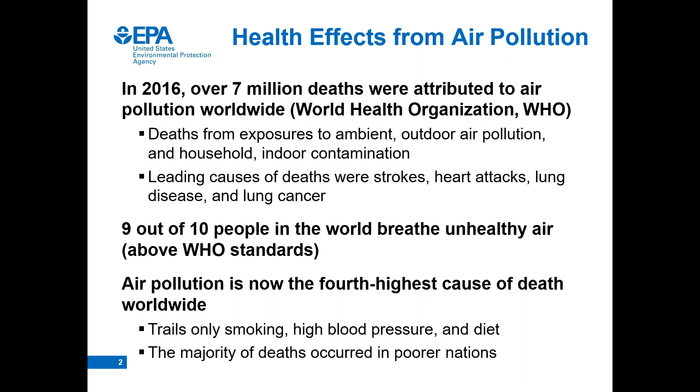So we can go to the next slide. And essentially there's 3 primary sources of air pollution from transportation sources, specifically traffic. So we have combustion of fuel, so the exhaust emissions, and we do tend to separate those by exhaust from cars and exhaust from trucks. In a lot of countries, light-duty cars and passenger vehicles tend to use gasoline, heavy-duty trucks tend to use diesel. And there are differences in those emissions as well.

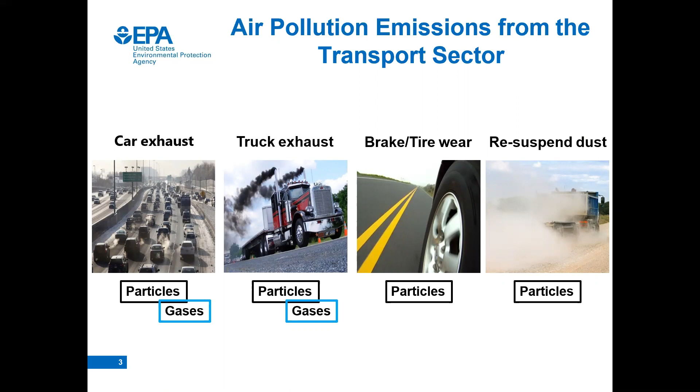But then we also have brake and tire wear. We also have the dust that can be re-entrained from transportation sources. And again, these all can contribute to particulate matter in the air, but then also can contribute to quite a few gases that can be emitted, especially from exhaust emissions, things like nitrogen dioxide, carbon monoxide, toxics like benzene, toluene, etc. So we can go to the next slide.

And transport is really the most, if not the dominant source for local, regional, and even global air pollution. Again, I'm going to tend to focus a lot on the local air pollution issue, but keeping in mind that a lot of this is relevant to regional and global air pollution. In many urban areas worldwide, 70% or more of particulate matter can be attributed to traffic and other transportation sources. Often, actually, we know worldwide more than half of nitrogen dioxide and carbon monoxide comes from transportation.

And again, we know, especially in exhaust, but also even tire and re-entrained dust, that there's hundreds, if not thousands, of other contaminants and compounds that can be emitted, many of which are known toxics or cause adverse health effects. So we can go to the next slide, number 5.

And again, transport can actually affect disproportionately low and middle income countries in particular. There's many reasons for this. I just listed 3 of the major ones. They often have older, poorly maintained vehicles. Often they're secondhand vehicles shipped from wealthier nations as well. And so their operation, their maintenance of their after treatment, their air pollution control devices can be questionable and sometimes they're removed.

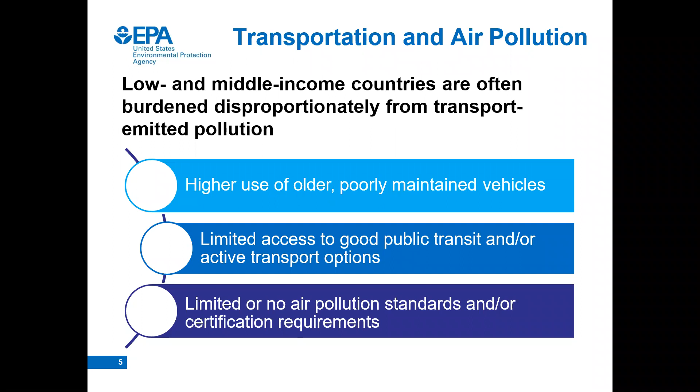And again, because transportation, traffic in particular, are so ubiquitous and so many people worldwide are exposed to these emissions daily, there's actually been hundreds of health studies that have really focused on this population that is so prevalent, both living, working, and going to school near large transportation facilities. And these studies are fairly consistent, showing this higher risk for these populations spending time near these impacts.

Things like asthma, cardiovascular effects, birth developmental effects, premature mortality, cancer, including childhood leukemia, have been shown to be elevated, and even things like cognitive effects. Autism has even shown association with spending a lot of time near these roads. I have on this slide a cover for a report done by the Health Effects Institute, which was a large meta-analysis that really first showed the consistency in these findings and concerns about adverse health effects. So we can go to the next.

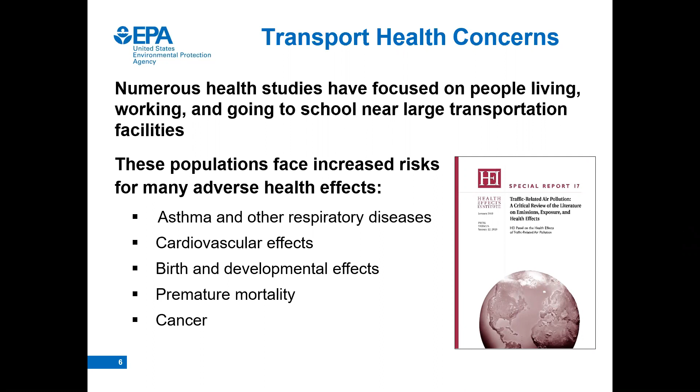There have been a few studies that have shown that pollution can be elevated near these large transportation sources, especially within the first 200 meters. So on this slide, I have another meta-analysis. It was done on about 50 studies worldwide measuring air pollution changes with distance from large roadways. And we can see on the far left, pollutants can be as much as an order of magnitude higher within that first 100 to 200 meters of the roadway compared with further distances away.

So again, exposures can be much higher and they can be much different near the road. So this is one of the causes for the concern for all this elevated health risk for these populations near the road. And so we can go to the next slide.

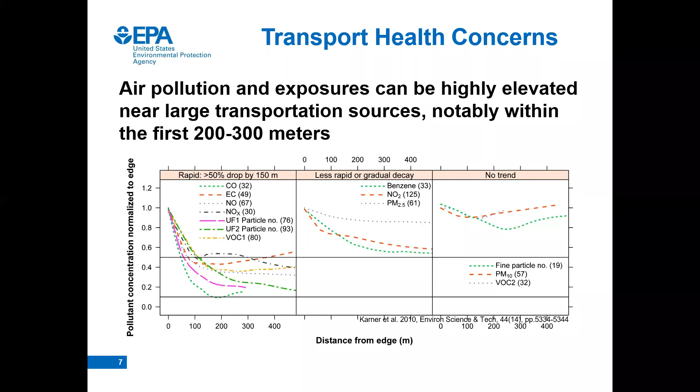And even though we're really talking about small distance, there's actually quite a large portion of the population that either lives, works, or goes to school in this short distance because it is such a center for economic activity and development in our urban areas. And me working for a U.S. organization, I do have some statistics for the U.S. We estimate over 50 million people live within 100 meters of a large transportation facility.

Most of that is our large highways here in the U.S., but that does include airports and ports, rail yards, and again, all of these are sources of concern and interest as far as elevated exposures. We also estimate over 4 million children attend classes within 150 meters of, just in this case, a major highway.

And I have a couple of pictures just kind of showing examples, but they estimate that about 1 in 11 schools in the United States are located within this distance of a major highway, and actually 1 in 5 new schools, which makes it even more of a concern. And then we are finding that these numbers are often even higher in some of the low and middle income countries as well, where even more development, more population is located near these major transportation facilities.

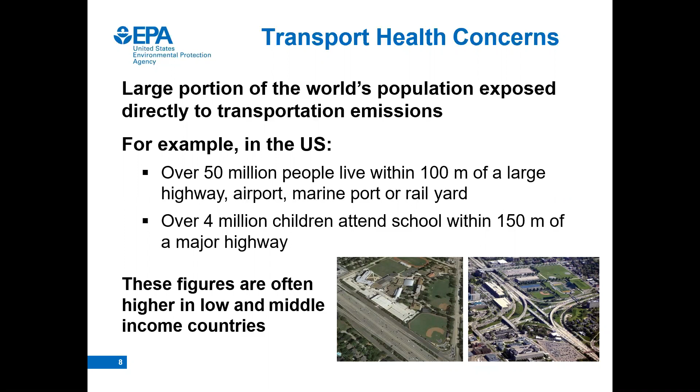So we can go to the next slide. And when we talk about mitigation opportunities, we really kind of target, or at least put into categories, these 3 areas. And that's how I'll present mine today. And so we look at the emissions and how we can measure and control emissions, how we can do that also for just air pollution concentrations once the pollutants have been emitted, and then actually how people are breathing these pollutants in, or their exposures.

So again, we can go to the next slide. And again, just to highlight that we're going to start with emissions. And so then we can go to the next slide, slide 11. So we have a number of programs to measure emissions from motor vehicles and other transportation sources. Again, I should just point out now, a lot of these techniques aren't just relevant for motor vehicles on the road, but we can do this for trains, ships, to some extent planes, although planes are much more difficult.

But again, these programs and these techniques are applicable to these other kinds of sources as well. But because the traffic and these motor vehicles are the most ubiquitous, I'll really focus on that area, but happy to answer any questions on these other sources.

So as far as measurement programs and the importance of these programs, they really do answer quite a few questions that are very relevant. How bad is the problem of air pollution and emissions from the transportation sources, especially understanding the transport sector compared with other air pollutant emission sources, and even within the transport sector, which types and sources contribute the most to poor air quality. Then also, are any control strategies that have been implemented effective, or do we need to make adjustments in the future? So again, these all lead to why measurement programs are important.

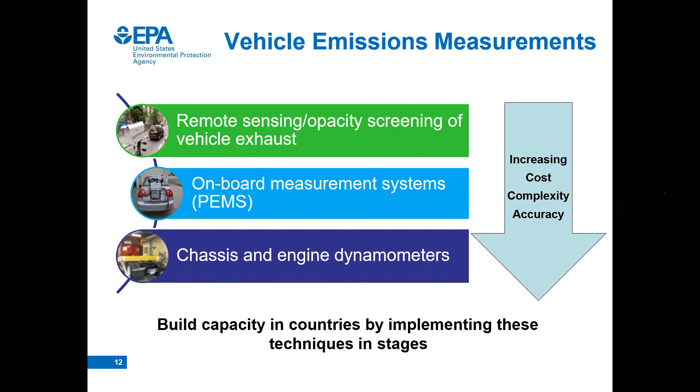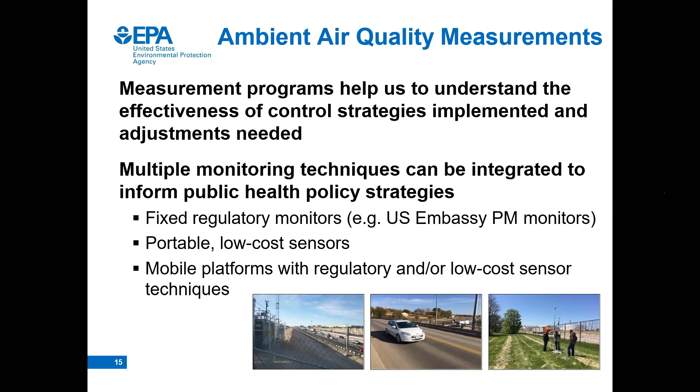But also these low-cost sensors have been really popular used in mobile ways, so people either walk or bike with the sensors, or they've been put in vehicles as well to try to understand spatial variability of air pollution levels. And again, all of these techniques have their strengths and their limitations, and it's important to understand them and often to integrate these different measurements. So we can go to the next slide.

And another area where we do a lot of capacity building is on the air quality modeling side. So when we're looking at transportation source impacts, we have to separate it: we estimate what the emissions are first, and then we also simulate and estimate what the dispersion is in the atmosphere after they're emitted. So there are a number of models that are available for each of these. In the US, we have what's called the MOVES model, and there is an international version called MOVES International.

And generally, what often in other countries that use this, it's based off of U.S. and some European emission standards and typical emission rates. So often those are used initially to understand with local activity data. But then also, they are available. Country-specific emission factors can be integrated and implemented to create a model for a particular country.

So then on the air dispersion side, again, we have AERMOD in the US, so that can estimate these local impacts from transportation and other sources. EPA also has what we call R-Line, which is like a research type of model that can integrate some other issues like, and I'll talk about it a bit, like solid structures or barriers near roads.

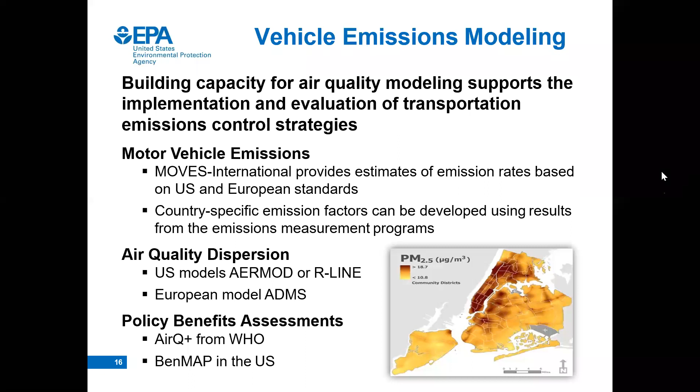Sorry, Richard. Are we still on slide 16? We're losing you a little bit. Oh, I'm sorry. Yeah, no, we switched to the next slide. 17. Okay. Sorry. Yeah, the connection is a little iffy right now. Okay. Yeah. Again, just interrupt if you stop hearing me.

Another program that's grown and been implemented in Stockholm and London is congestion pricing. So you actually charge vehicles for driving in a certain area during a certain amount of times. So again, these are similar to activity reduction programs like transit and walking biking options, but a little bit different because again, they're really affecting air quality, especially at the local scale. If you have an area that's a very, what we call hotspot or very high concentrations, these can be effective programs.

There's also been proposed what we call development exclusion zones. So an example of this is in California. They try to restrict schools from being sited too close to major highways. So it's essentially not allowing either certain development or any near the pollution source themselves. Other than to change or control the source itself, you distance people from those sources.

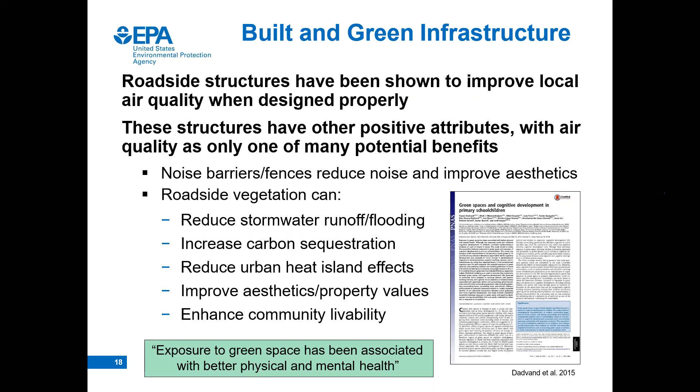So as far as a resource, we developed some recommendations for organizations that are especially interested in planting and maintaining roadside vegetation. The studies show that roadside vegetation can improve local air quality, but some studies also show that it can either not have any effect or even make air pollution worse locally. So we really try to highlight the key characteristics of roadside vegetation that can improve it, but also characteristics to avoid, so you don't make pollution worse. These recommendations deal with vegetation alone, and with vegetation along with solid structures like a fence or a noise barrier.

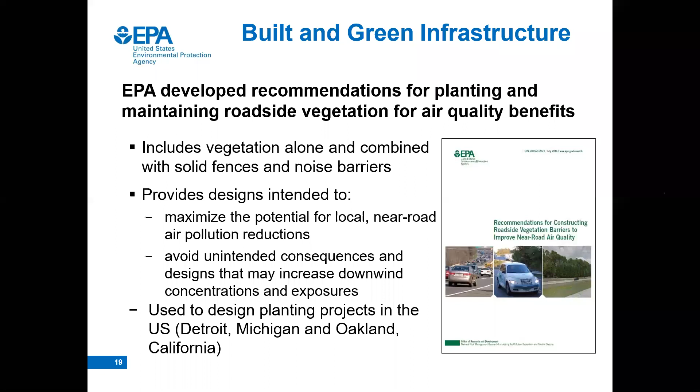And I did want to point out that we developed these recommendations initially for some pilot studies that we did here in the U.S. in Detroit and Oakland. So you can go to the next slide. Again, I won't go into too much detail on this, but I did want to highlight some of the examples that we include in the recommendation.

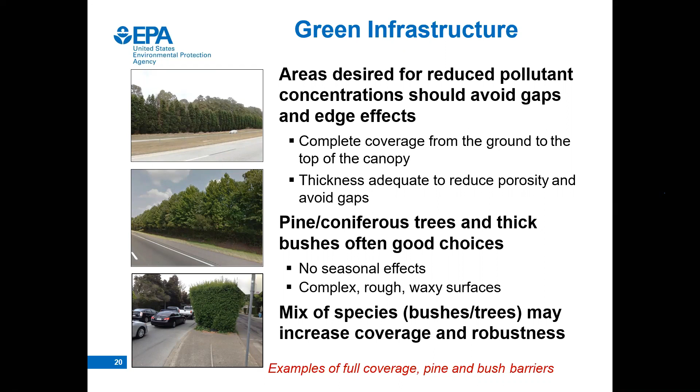So for roadside vegetation to be effective, especially full coverage, from the ground to the top of the canopy, no gaps, no openings, whether it be dead vegetation or highly porous vegetation, using vegetation that doesn't have seasonal effects like pine or other coniferous trees, and mixing vegetation is also highly preferred for maintaining the vegetation and for effectiveness as well. These pictures show a few examples from the report, from pine trees and mixing deciduous and pine trees, to just hedges, which could be more useful for especially dense urban areas. So if we go to the next slide.

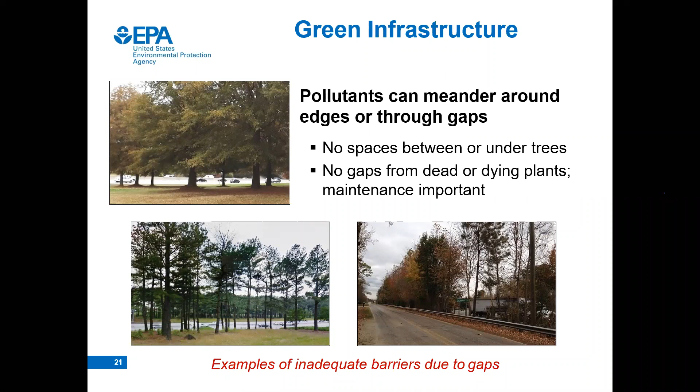And we do discuss a bit about solid barriers alone. Vegetation increases dispersion, but we also get some particle removal from vegetation. With these solid structures, they essentially just increase dispersion and dilution. So they're reducing concentrations downwind, but they're not actually removing any pollutants. But in an area where concentrations can be high, that could be really important for the health of nearby residents.

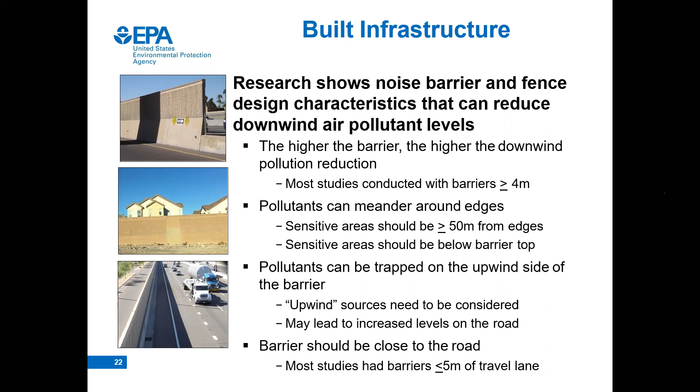Then last, with the next slide, actually, a lot of research has shown that combining the solid with the vegetation can be the most effective, because with the solid barrier, you definitely avoid those gaps down low. You don't have to worry about dead or highly porous vegetation. But then you have the vegetation either in front of or behind that actually also adds the extra removal, especially of particulate matter. And so, whenever possible, combining the two can really be the most effective option.

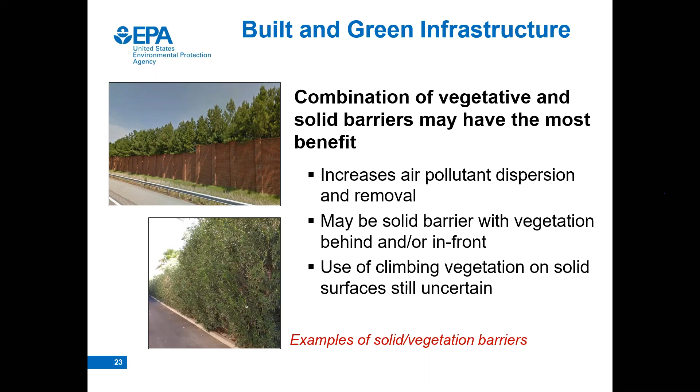And then we can go to the next slide, slide 25. And again, just wanted to point out that we do have some pilot studies going on in the U.S., in Detroit and Oakland. These pictures are for the Detroit project, which is a park right near a major road with about 250,000 vehicles a day. Actually, many trucks. It's part of a big international trade corridor with Canada. And actually across a highway is a refinery that you can see some of the tanks in the distance on that top photo, or the photo to the left.

So again, the plans are to plant a vegetation barrier as shown in the profile drawn down there at the bottom. And we'll be doing air quality, meteorology, and noise measurements before and after planting that vegetation and assessing not just the air quality benefits, but there are some flooding issues at this site as well. So what the water runoff control benefits are to this plan too.

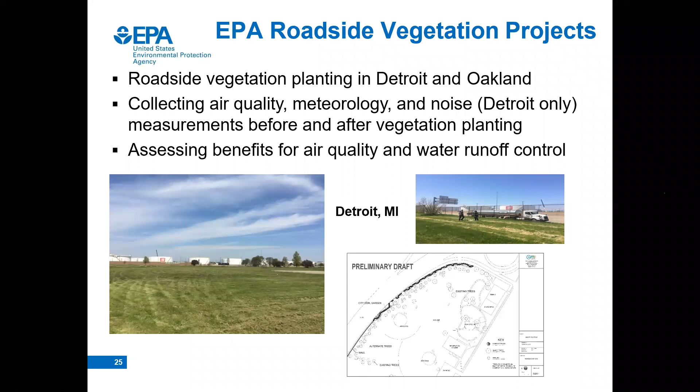And so again, lastly, we also are looking at how we can improve the air that people are directly breathing. So we're looking at exposures. So we can just go to the next slide. Again, so when we're looking at exposure reductions, we're really focusing on indoor air filtration, but we also do want to look at ways, again, to improve outdoor air, whether it be through emission standards or some of the other concentration techniques like built and green infrastructure I mentioned earlier. And then also we want to consider changing how we develop. So you can go to the next slide.

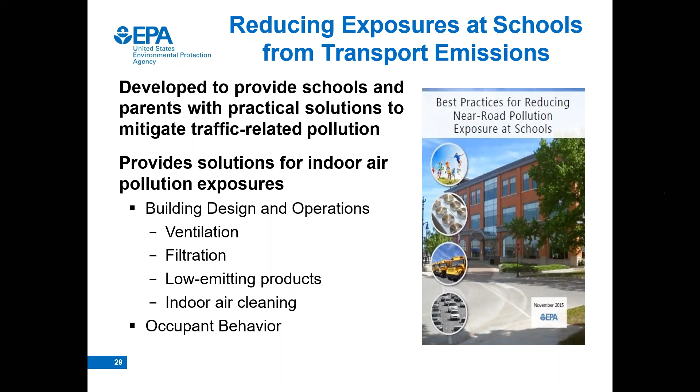So again, just a few examples. So like for indoor air quality, we talk about ventilation options, using low pollution emitting products and materials inside the building itself, as well as portable air cleaners, if doing central air isn't possible, and the effectiveness of those air cleaners. And things like occupant behavior, when to open windows, when not to open windows, don't open windows, especially during rush hour, when vehicle traffic is high, when air pollution levels in general are high because of morning inversion conditions and things like that. So they're trying to educate on some of the timing as well of when air pollution can typically be high in an urban area.

So you can go to the next slide. And again, the guide also addresses outdoor air issues. So there's things on site, whether it be for people picking up and dropping off kids, where they're not idling, or at least reducing the amount of idling, and upgrading buses.

And again, since this is a little bit U.S. focused, it was really talking about upgrading of school buses, but for other countries this could still be applicable for transit, either directly for schools or transit that's passing by schools or that the kids are often using to get to and from school. And then it also talks about walking and biking and really trying to encourage those options for active transport.

Again, the guide also deals with the roadside structures like I talked about earlier. And it also deals with site location and design, which I'll talk about here in a minute. So we can just go to the slide.

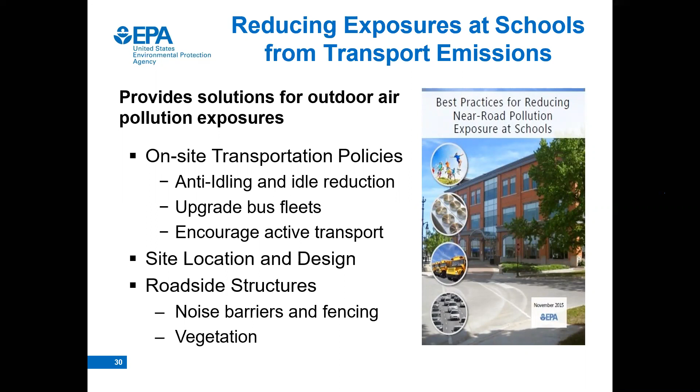And this is actually some work that's ongoing right now, that we're drafting some recommendations for, really trying to target developers and planners. As I said earlier, in the U.S., 1 in 5 new schools are located within 150 meters of a major highway. It's really trying to help them understand how that can affect kids' exposures and how maybe to redevelop land. So we just kind of give guidance.

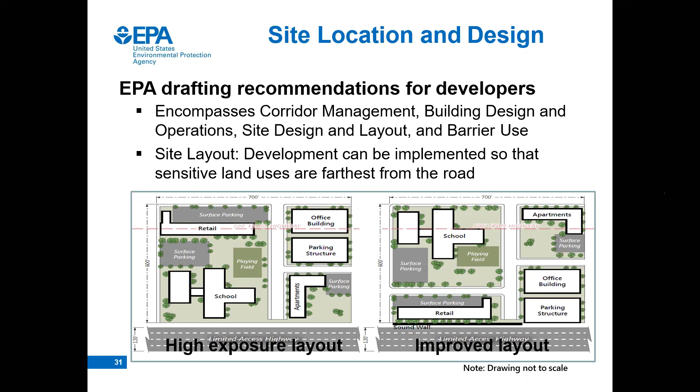But then if there's retail, having retail, where again most people won't spend a lot of time, closer to the road rather than the school, or some residential, like apartments or things like that, being close to the school. So with that, we can go to the next slide, the summary.

And again, just trying to give an idea of some of the work that we're doing, some of the ways we're actually trying to help other countries implement effective control strategies, especially targeting the transport sector. Based on these health concerns, it's really increased the importance of understanding and controlling these transport sector emissions, especially because everyone is exposed to emissions every day. And there's much evidence about the effects that exposures to these emissions cause.

So again, from the EPA perspective, we really are trying to support especially capacity building and training for other countries to address this issue, and are looking at implementing both measurement and control programs to protect public health and welfare.